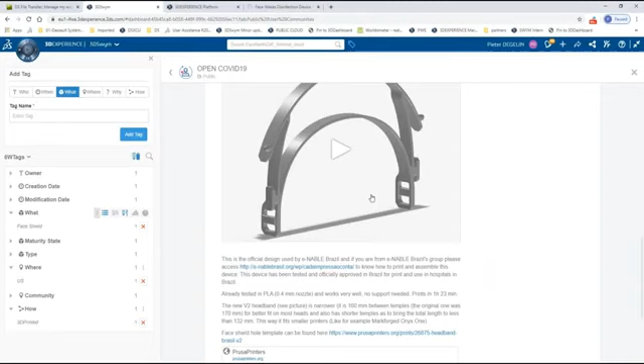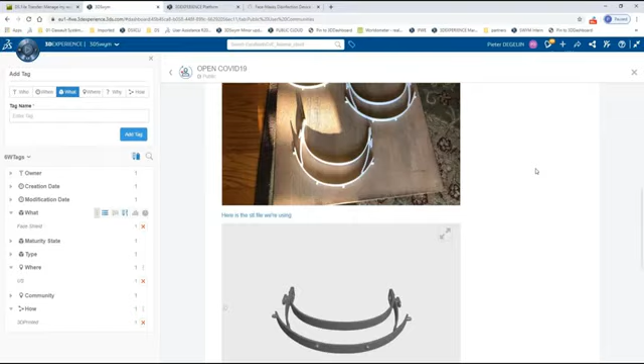And here you can see that somebody in Brazil has done a design of a face shield bracket. I'm going to have a look in the web at how the 3D looks. So everybody in the company that has access to this community will be able to see the 3D objects like so. And obviously as well, we want to share the STL file so that people can print it at home. So I'm thinking this is a good starting point for our own face shield design mask.

And so the next step would be, since I have my own cloud environment, to create my own community. You can see the starting point is a dashboard, the V5 dashboard that is active now. I add an extra tab to it and I drag and drop our community tool. And I will add a community of our own, which we're going to call the face shield community.

So I will add a small description to make sure that everybody understands what the community is about. The idea is to gather people to brainstorm on some new ideas for a printable face shield screen. So I created the community. Since I'm the only member for now, I will only have the ability to see the content.

I will tweak a little bit the look and feel of the community, and I just drag and drop an image into it. I can activate the features of the community. I can define what type of community we want to have, whether it's a secret or a public one, whether people can make wikis, post questions, make ideas, and so forth. I can tweak the ideation pipeline. I can change the colors around and so forth. So the cloud is about configuring what is delivered out of the box, but you can see that you can do quite a bit of this.

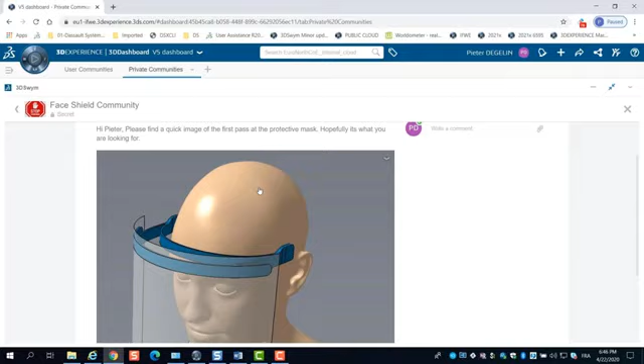Yeah, so I have immediate access to the post. I can have a look at it. I see the image. I think it's a great idea. And I will promote this post into an idea. So then it comes into our ideation funnel with the different statuses, and people can start liking, not liking, and so forth. So I'm obviously going to do it in the face shield community that we just created.

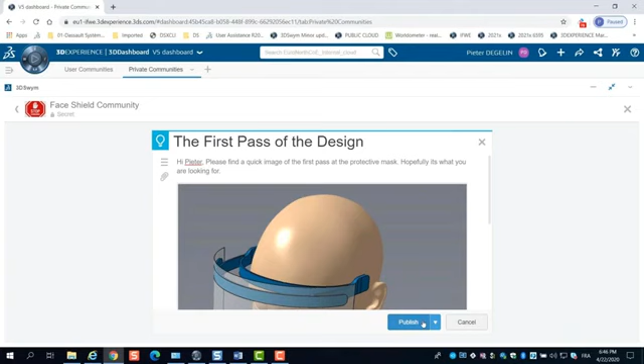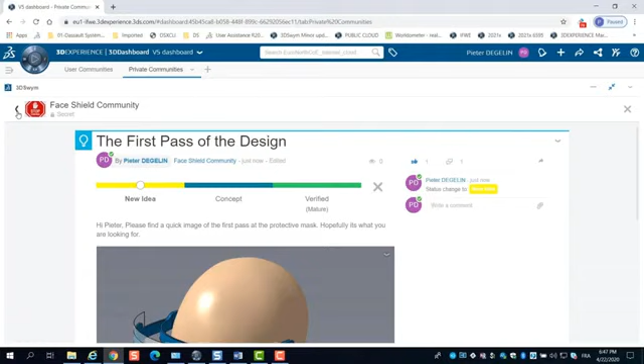And so now you can see with the blue lamp that it became an idea. And then we can have a look at the different ideas through the ideation funnel. So this one is obviously a new idea. I'm gonna like it by clicking on the thumbs up, obviously, because I think it's a great idea.

And here in the filter, you can see all the ideas that belong to our small community. Now, since it's a brand new one, only started just now, there's only one idea. I can hover over it and see, let's say, the summary of what the idea is about. And you can see who is liking it or not.

Now, in the meantime, Peter has thought about his design, and he has some questions about the headband securing point. What I propose to Peter is to start uploading his 3D V5 models into the cloud, so I can then do a proper review based upon the 3D information. So I'm just having a look at what he is posting to me through this community.

And at this point, I was still local, wasn't I? I wasn't in any cloud. I was still on my local machine working in V5. So the next step in the story is how can a CATIA V5 user connect to the 3DEXPERIENCE Cloud? And so the first bit we needed to do, of course, is to install the connection between the local CATIA V5 installation and the cloud.

And so for that, we need, of course, to have the right role. In this case, it's the Collaborative Designer for CATIA V5 role that will be assigned to you by, let's say, your cloud administrator. And once you have this role, you have access to an application which obviously is called CATIA V5. You can add it to your favorite apps if you like. And then you will click on this application.

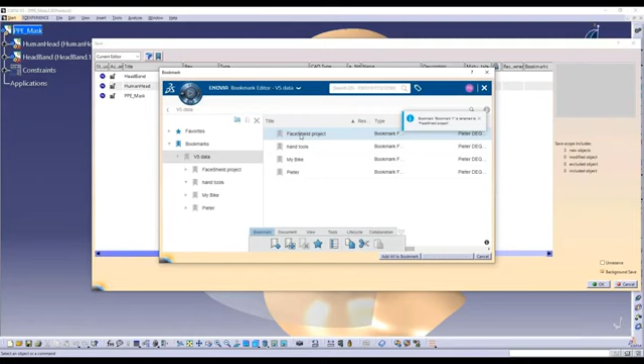So we're adding that to the bookmark. One other thing to mention as well, that we're going to allow something called a background save, which means that once we activate that save, this assembly has been locked, so I can't change it. But we'll see in the bottom right-hand corner, there's some green progress bars. And what that means is it's now uploading. So we can still carry on and work in the background whilst we're uploading our data to the platform.

So in this case, if we want to create a drawing, we can simply go into the drawing functionality, and we can see that in the background, the mask is updating and it's now completed. So the lock icon has disappeared.

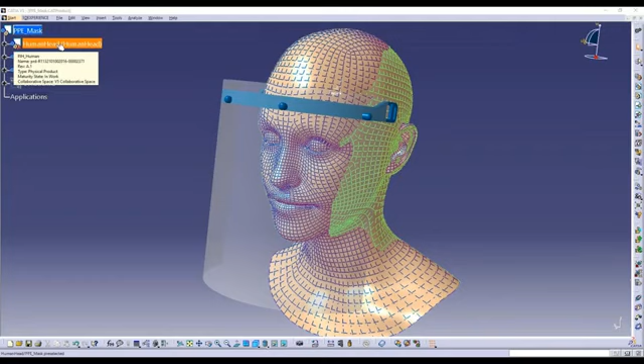So once we're into the 3D Experience platform, we're able to gather information from it directly. So we can see a highlight there, it's revision A. And we can even look at the properties that have been put into the 3D Experience platform. So it tells us who stored it, when it was stored, what the revision is. So if we want to get some traceability, and it'll even tell us which extension, in this case, Catia V5. So from here, I'm going to hand you to Peter to tell us a little bit more about the platform and what that can bring.

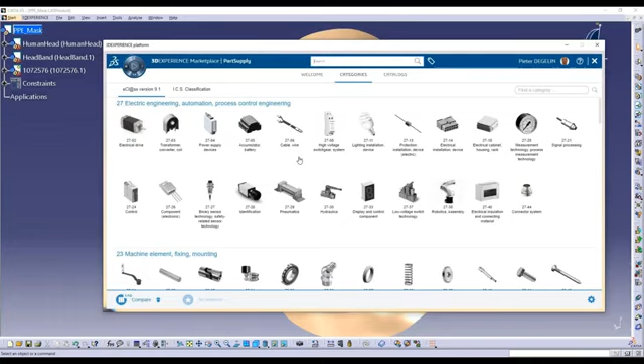Yeah, so one of the interesting features as well that come with the Catia V5 integration is the access to PartSupply. So PartSupply is actually a library of standard parts. So you can see we have around 30 million standard parts in there. People can have access to categories of parts from within Catia V5. You can just click on one of the categories and then get access to the parts right away. Or you can do a search, of course. You can search by country, by category, by provider, by publisher, and so forth.

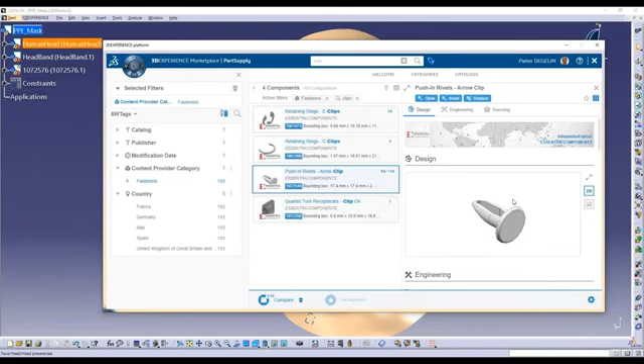So what I want for our design is a plastic clip. So I just type clips. I'm going to look in the fasteners, and then I find something that looks like something I can use. I can add it to my list to compare with other selections I might find, or other parts I might find. There is a configurator tool in there, so I can choose the right size. So I'm going to go for 6mm one.

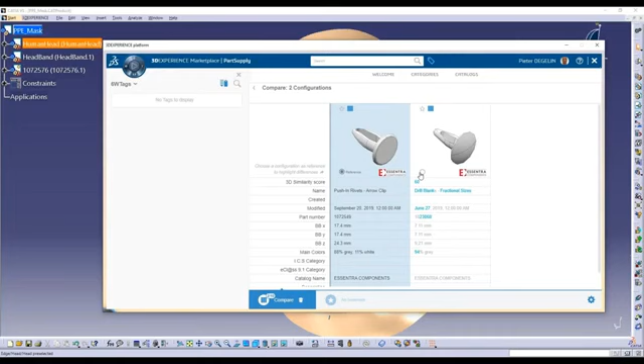There is a similarity search that is automatic, and then you can compare the two parts that you find, and you will see the differences in blue. You will see also percentage of similarity in there. And then I can just simply insert with one click on the button this part into my V5 assembly. So you have the part in the assembly now.

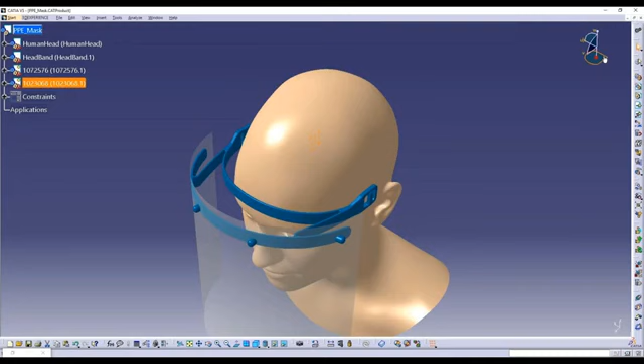Obviously, it's a new part. I can use the compass to change the position a little bit, or to put some assembly constraints in there. And there you go. So this is also a great added feature that comes with the cloud integration with Catia V5.

So we'll go to the next step. So Peter has done his design in Catia V5. It's now in the cloud, and the big advantage of that, of course, is that I, as a project manager, can then create some reviews in the cloud without having access to any 3D tool. And that's what we're going to show you in this step here.

So I start off again from my dashboard that has two tabs, the user communities, private communities, and I'm going to add a Face Shield project data tab. Now, the idea here is to gather all the data concerning our Face Shield project. And for that, I'm going to do a search in the database, a simple search like you do in any database. I search for mask.

You can see that I have two posts, and I have a Catia V5 assembly that sits in this collaborative space here. And then I can pin this search into my Face Shield project data tab. Now, the interesting part of this is that it's a search, meaning that whenever new data arrives, it will automatically be added to this search result. I again can further drill or filter my search results if necessary.

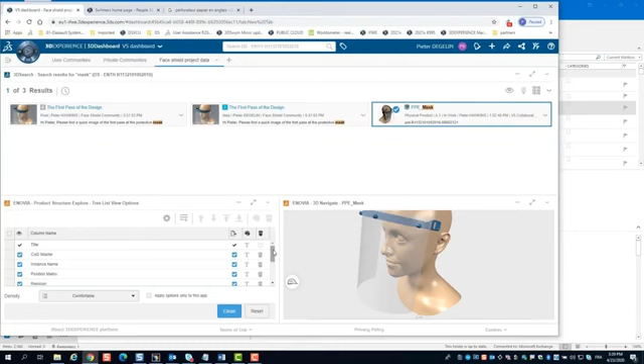I can even go into the settings of my widgets. I will make it a little bit bigger so you can see what I mean. I will add some thumbnail displays there. I can add any attribute that is available in the platform. I can change the order of things. So any of these widgets can be, let's say, customized to the user needs so that he gets the right information at the right moment.

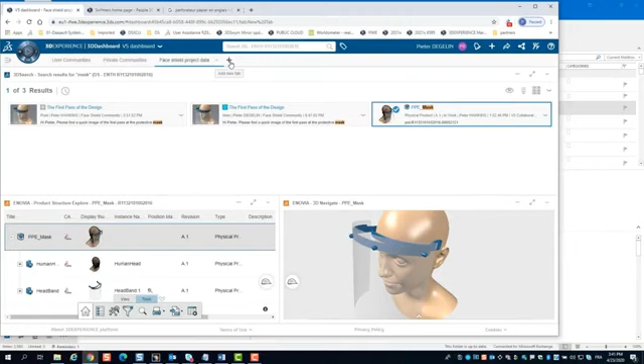So here you can see our revision A of the mask. I have a 3D visualization, and so this will be my start point whenever I want to go back to this project data. So next, I will add a review tab, and in this review tab, I will add an application that we call 3D Markup. So I will drag and drop the widget in there,

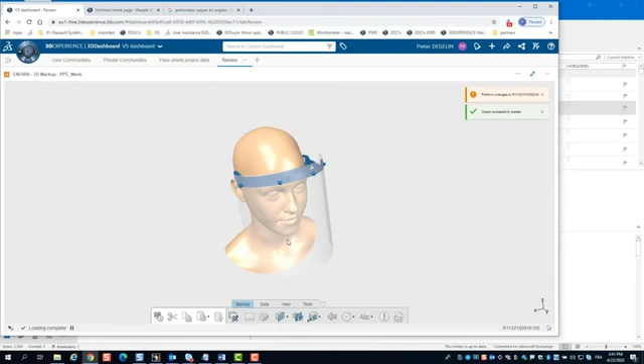and now I can make this a little bit bigger, go back to my Face Shield project data, and drag and drop the data into my review. So on top of the 3D visualization, what we can do now is we can start adding some comments to do a proper review based upon the V5 data created by Peter.

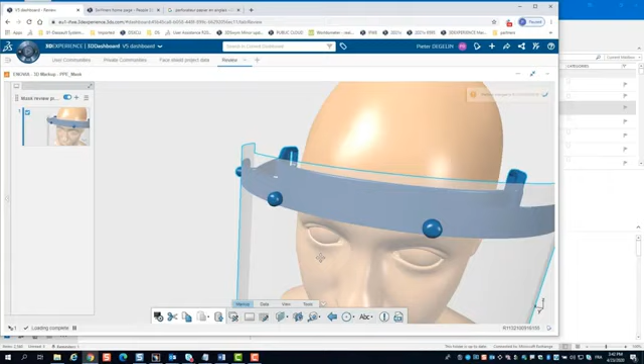So I'm going to start by creating a markup object. And the great thing about markup objects is that they will not touch the original V5 data. There's going to be a link, of course, between this object and the CATIA V5 assembly. So my markup is created automatically. I have a first slide, and there are a couple of changes I want Peter to do.

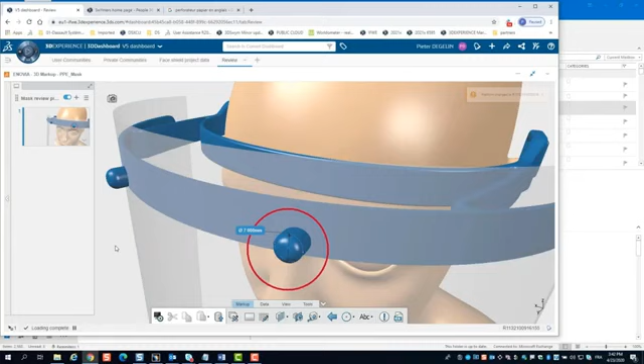So the first one is that I want people to be able to build this device or this product easily at home. So we're going to do some small enhancements. You can see the diameter here of this plastic clip is 7 millimeters, which is not really the right one, because we want the hole diameter to match the standard hole puncher size, which is 5.5 millimeters.

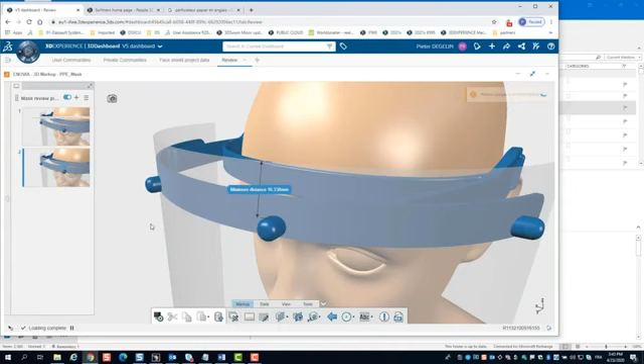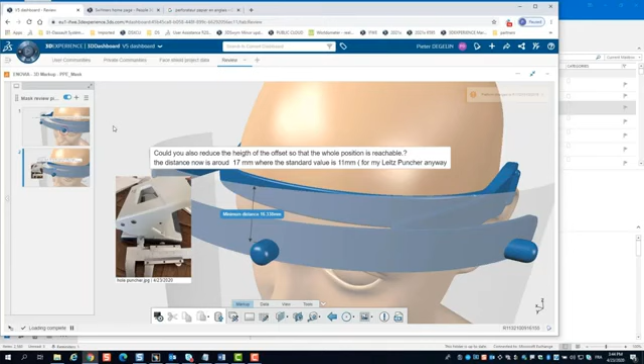The second modification that Peter needs to do is to adjust this offset here a little bit. So again, to make sure that we can easily punch the holes in the transparent shield with a standard tool. So I'm going to add a picture of the standard tool that I'm going to use. So this is the hole puncher I've put in my slides, to make clear what Peter needs to do.

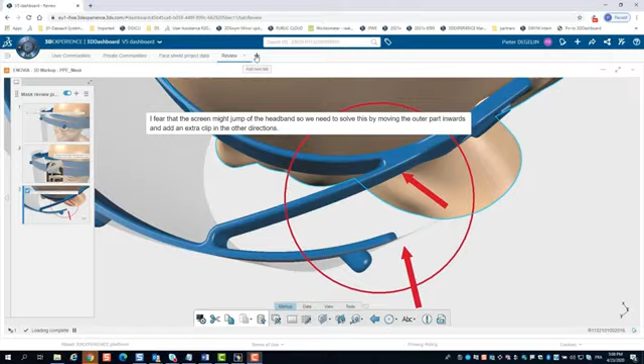And then a third modification. So again, I'm using the markup slide to explain what I mean. I want to give people a couple of options to fix this part to the face, and so I describe what I think Peter should do.

So last but not least, I'm going to create or add a new tab, which is the Lifecycle tab. For that, I'm going to add a product structure editor widget. We have a couple of other widgets that would do the same job. And in here, I will drag again my assembly. So we'll move it from our face shield project data into the Lifecycle tab.

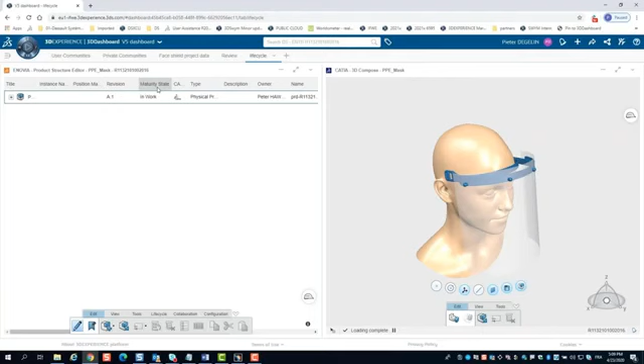And what we're going to do now is we're going to prepare Peter's work so that he can right away work in a new revision. So obviously the maturity state and the revision is important information for me. So I tweak a little bit the position of the different columns. And you can see now that the mask itself and the two parts are in work, and we are in revision A.1.

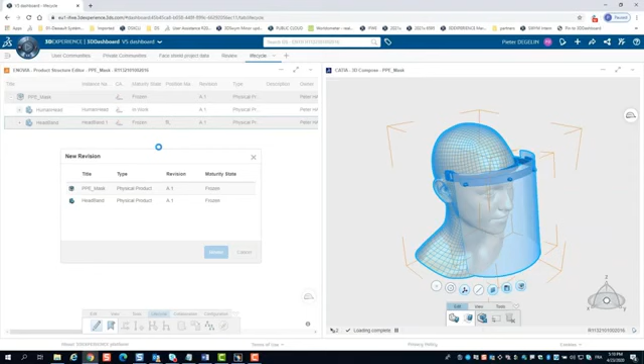So what I'm going to do now is from within the web as a project manager, I'm going to put the top assembly and the headband in frozen so that this data is a little bit secured. And at the same time, I'm going to create a new revision. So the web interface allows a project manager to prepare the work for the designers so that they only have to focus on the real design work.

So now you can see that we have a revision A and B for the assembly and the headband. And I can even put them side by side in my 3D view so I can see the differences if there were any. Now, of course, here there are no differences because the one is a copy of the other.

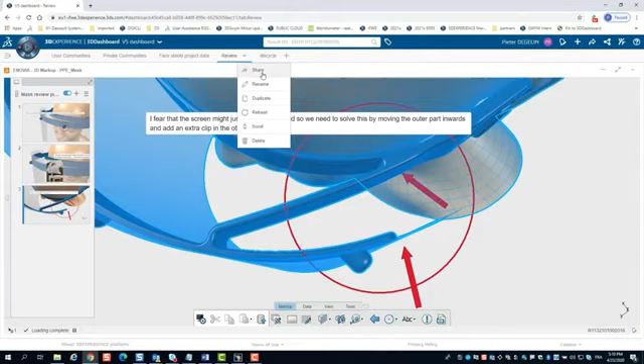So once my preparation is done, what I'm going to do now is share these two tabs to Peter so that he does not have to lose time figuring out what he needs to do or searching for the information. So I'm starting to type Peter's name. There's an auto-completion. I can type in a small message.

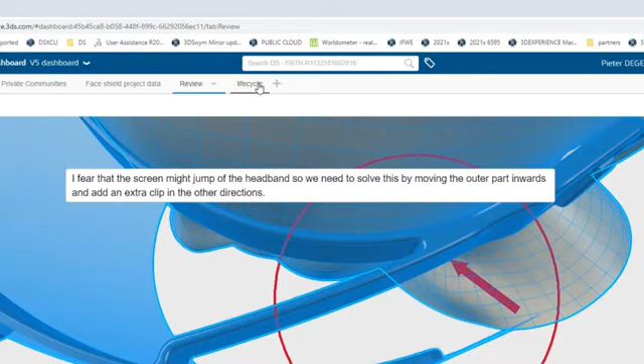Look, Peter, I want to share this with you. Can you have a look? There are a couple of modifications that I propose to do. And I'm going to also share the Lifecycle tab so that Peter sees immediately that I already created the revision B for him and he can do the job in the revision B.

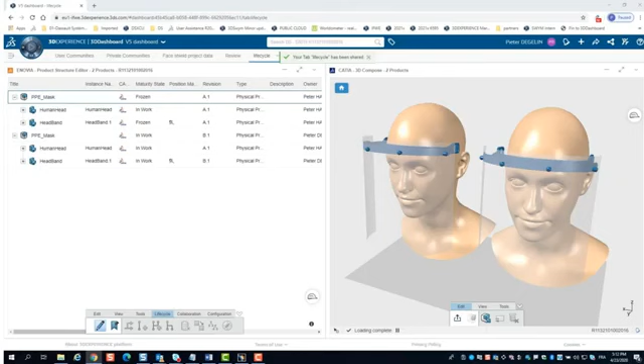So you can see that the tabs have been shared, and now it's up to Peter to start to do some proper design work based upon my remarks.

Okay, so if we pick it up from the design perspective, you'll notice I've got some notifications come through to my platform. And the first thing I can see is that Pieter has shared the review tab with me. And we're going to simply select that tab and we can pin that to our dashboard. So in this case, it's going to be my home dashboard.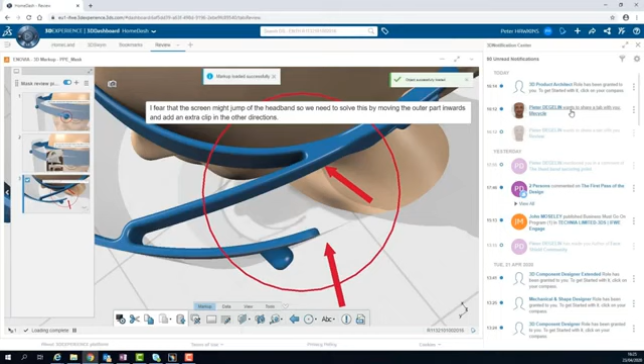I can then also see the information that Peter shared. So there's a few issues I need to correct. Before I dig into those, I'm going to pin the Lifecycle tab as well. And this is a great tool for being able to create your lifecycle, your snapshots in time. So rather than doing save as on a file, you're physically configuring it from here.

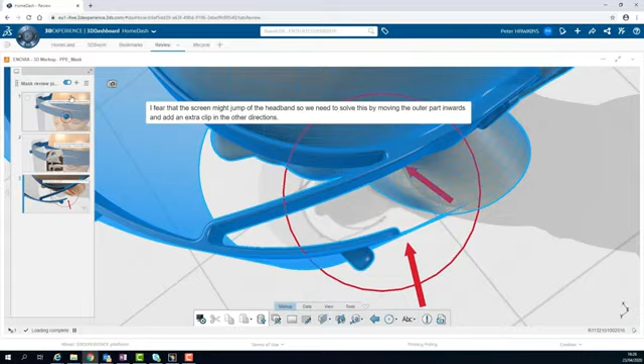So I'm going to have a little look at the review to see where I've gone a little bit wrong. Obviously that diameter, as we mentioned before, we need to change that so that we use a standard hole punch. So I'm just taking a little note of that, and then we'll jump to the next one, which is obviously to move that acetate A4 sheet downwards.

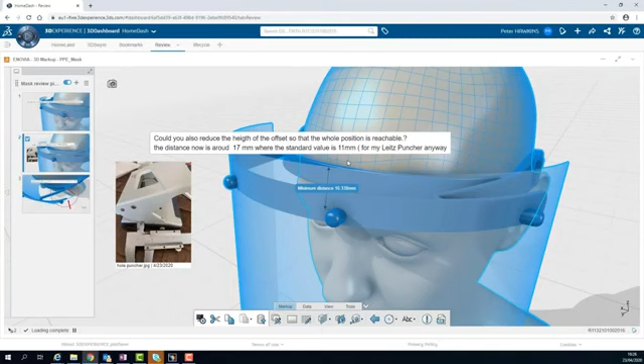And again, everything was built around that mindset that we'd have a standard piece of clear transparency sheet that we would use with a standard hole punch. And then finally, I need to go on, evaluate and see about putting some cool location lugs on the side of the headband.

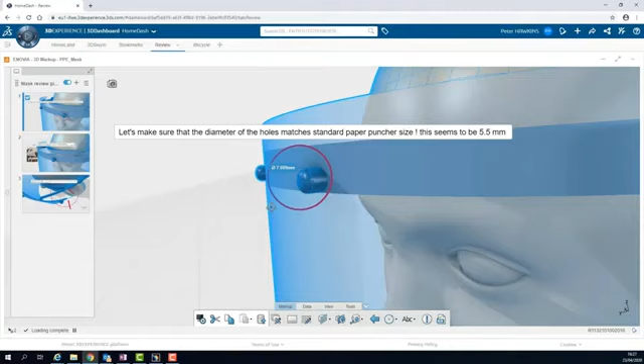So as Peter mentioned before, just refreshing my mind on that one, he's already done the lifecycle, the hard bit for me. So he's created me a framework, if you like, already. So it hasn't been in CATIA or anything, it's just been done within the platform. And I can see that I've now got a second version that I can start working on. It's now moved to the revision B, so that's the numbering system we're using. The head hasn't been changed because that's a standard part.

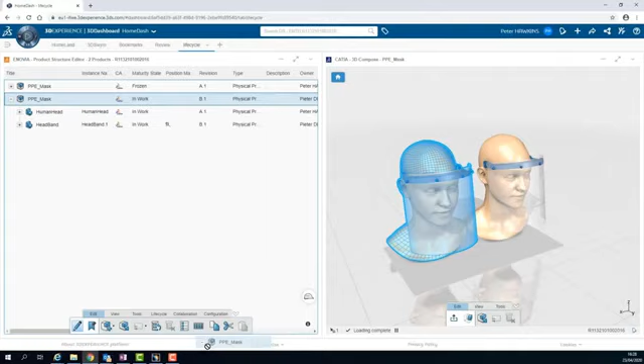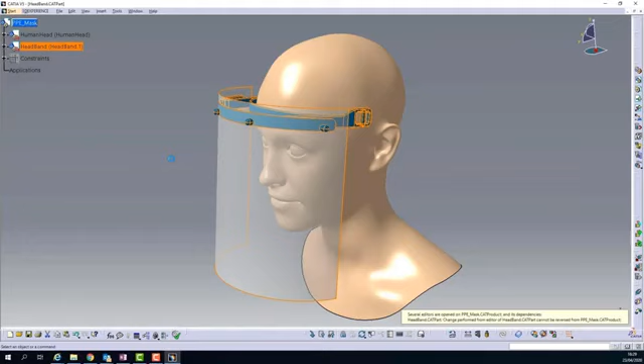And we're now going to simply get hold of that data from within the cloud and drop it straight onto the CATIA V5 icon, and that'll now launch that assembly and download it, and I'm now working with that data within CATIA V5. We've also got the ability to lock things off. You'll notice it asks me about reserving the files, but the file I'm going to work on is my headband. I tend to like to work down at a part level, so on its own. So I'm now opening that.

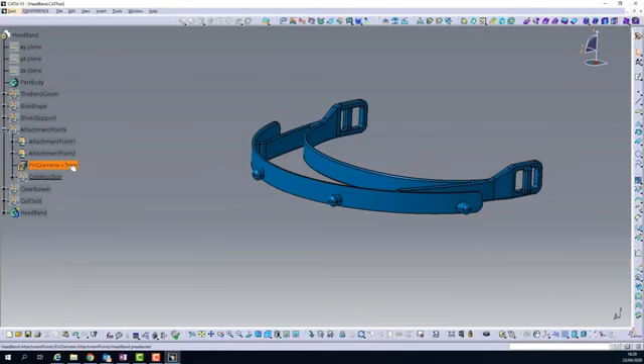And before I change anything, it's going to ask me again, do I want to reserve this? Again, because it's myself and Peter working on this project, I don't really need to worry about that at the moment. And we now need to go and have a look at those attachment points of where the shield actually fits onto the headband. And I've grabbed a nice little parameter here, so it's very easy to find the changeable things in CATIA. So we simply make that change quite quickly.

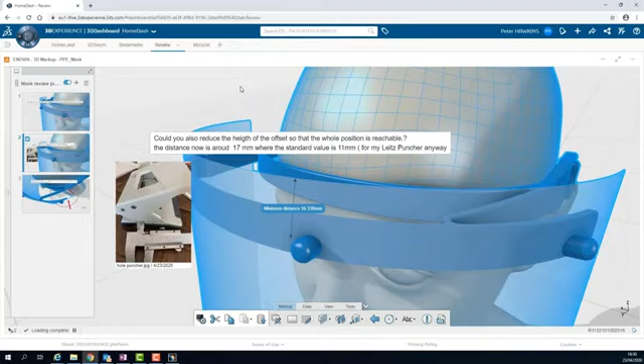We can also switch back to our assembly, and we can see the face shield is looking okay, just checking that out. And if we go into the platform, I'm just trying to remind myself of what value I need to drill in to move the shield down. So we'll just literally go into our clear screen, and I've got a top of shield plane that we can literally tweak and adjust and get us to just pull it down in line with the headband.

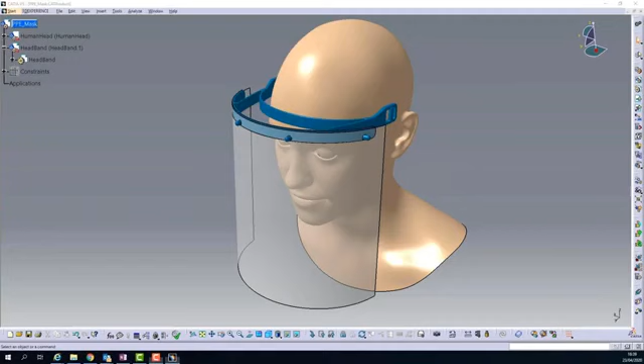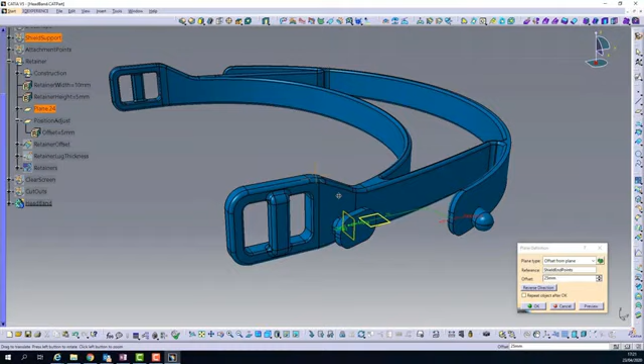So that was my sort of first pass after an initial review with Peter, and I was just double checking. There was one other thing I nearly forgot, and that is the location point. So here, the ethos is we build this from a 3D printing plate upwards. So everything wants to be mounted off of that flat plane.

And here I'm just literally playing around, having a look to see where I can place that and making sure that it is flat with the base plane. And then I can just simply add some radiuses and make it look pretty cool. So it's all smooth edges for the user.

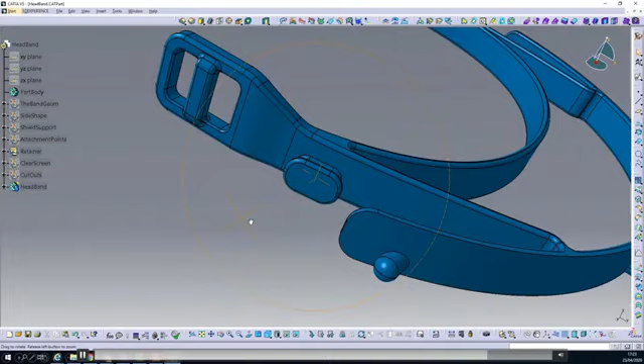I like to spin a lot. It's quite cool. I think it's an OCD habit you get.

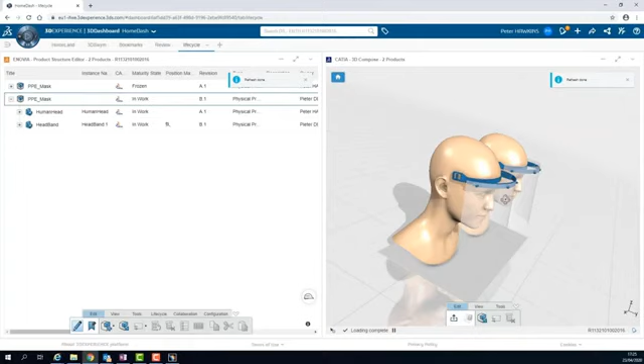And then we go back to the main assembly. We can see, obviously, those changes have been implemented. And I just literally update the graphics here with the platform, and I can see that data so that even a non-CATIA user can gain access and visually see the progress of our design. Which I think is coming on nicely. Yeah, cool.

Okay, cool. So how can we then do some sharing of the data that Peter has created and solve some further issues making use of the 3DEXPERIENCE Cloud? So the first thing, I'm logged in again in the platform, and what I see, I have a notification from our friend Vijay, who is also involved in our small project, signaling me that there is an interesting study done by some very bright simulation people in the COVID-19 community, that they've done a sneeze analysis, and he suggested me to have a look at it.

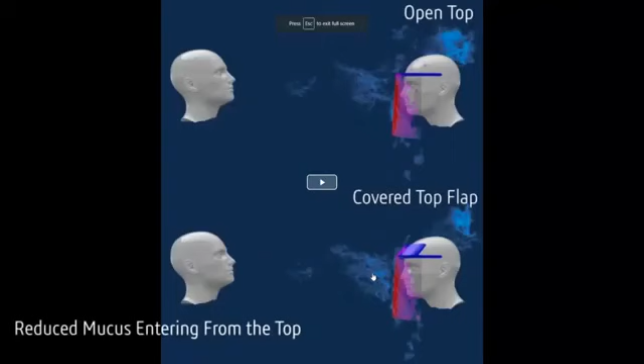So let's have a look. So you can see here, they've used simulation tools, XFlow from Dassault Systèmes, and they figured out that these face shields are great, but without, let's say, a covering between the shield and the forehead, it's not really very secure. So they've even analyzed it a little bit further. They've tested a couple of designs. So you can see the open top and the flap top, the cover top, and then the wide cover top. And the analysis they've done, if you read closely in the article, shows that the wide cover top is actually the best solution.

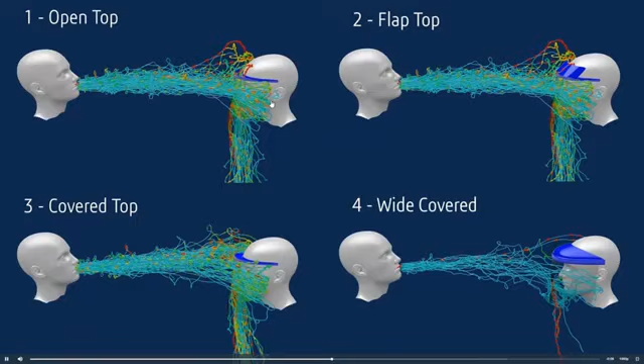So that makes me think, and what I'm going to do now is I'm going to start discussing with Peter about this. So the easiest way to do it is to share this link with Peter, of course. And by the way, I'm going to subscribe to the content, so anytime that somebody makes a remark or adds some new information, I will be notified. And I'm going to share this article with Peter. So Peter will receive the information, and then he can start thinking about perhaps designing a top flap to our design as well.

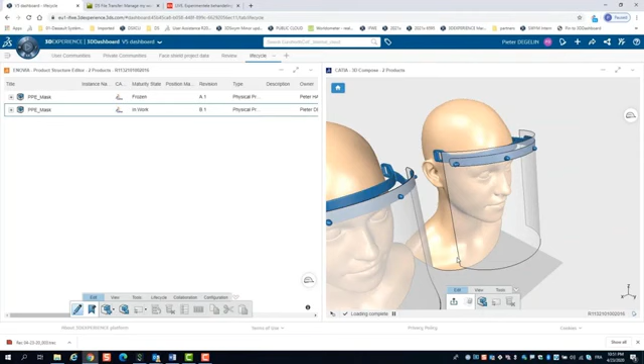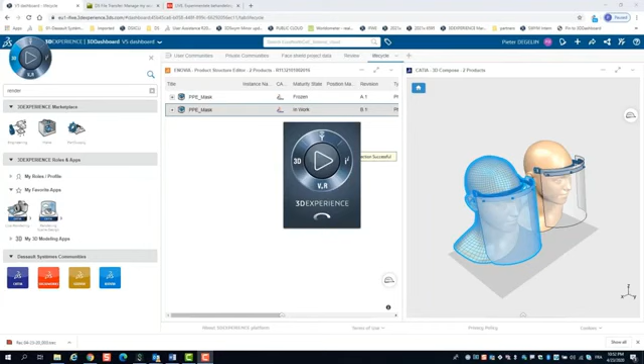Now, while Peter is getting notified and reading my ideas about it, what I can do as well is I can simply open up the first or the second revision that Peter did with the live rendering application, which is actually part of the CATIA 3DEXPERIENCE portfolio. And what you will notice is that I can simply select the CATIA V5 data in the platform, click on the live rendering application, and then automatically the CATIA V5 data will be opened in CATIA 3DEXPERIENCE. So no need to convert or migrate this data. You can simply open up the native V5 data.

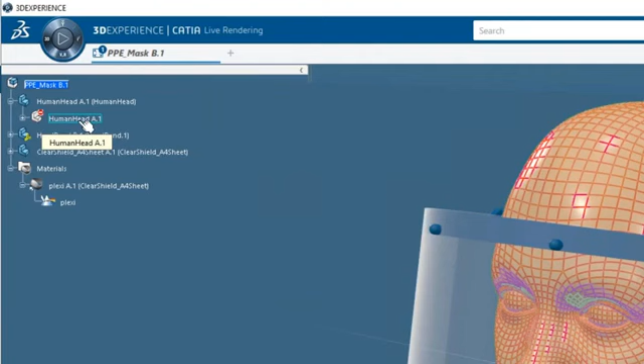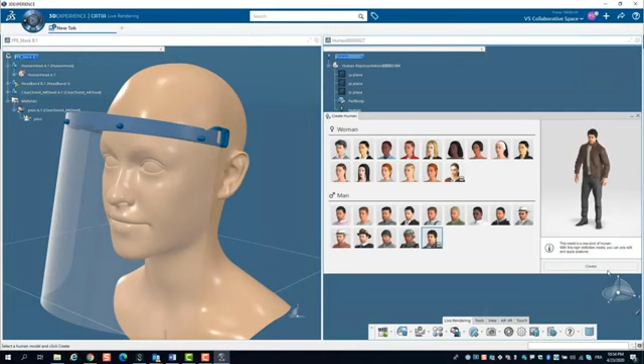And by the way, you will see on the level of the shape container that there is a stop sign indicating that this data is, let's say, mastered by CATIA V5. So Peter will be able to modify, and I, having access to CATIA 3DEXPERIENCE, will be able to repurpose the V5 data downstream. So one of the downstream applications I want to do is to create some nice renderings.

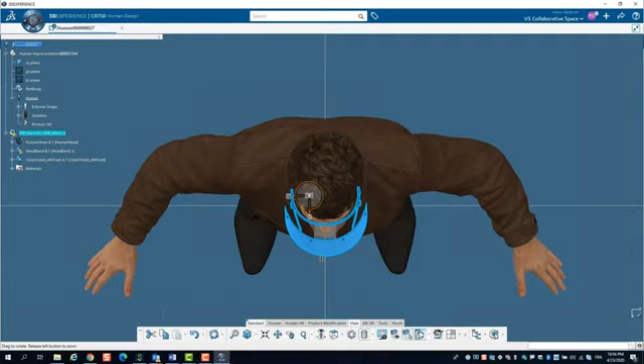And so for that, I open up a human or a mannequin, and I will drag the face shield into this human so that we can put it, let's say, in a more realistic setting. And I will position, of course, the face shield mask with the classical positioning tools I have. And I can even connect the face shield to the mannequin's head. So we call this a product connection. So we'll select the product I want to connect, and then the bone or the head I want to connect it to. So that's done.

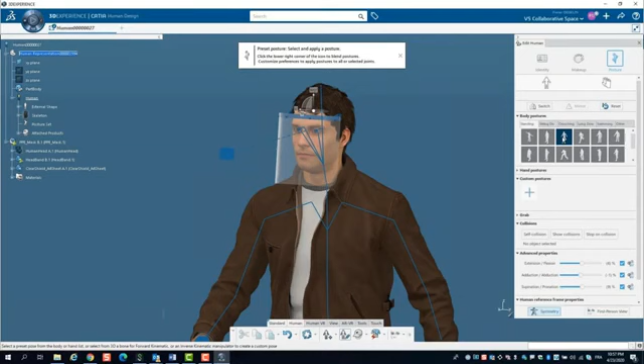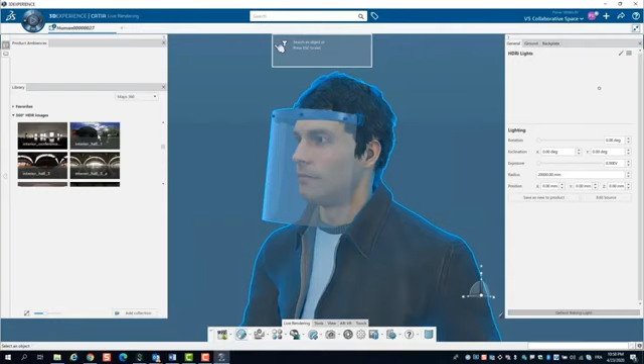And what's great about these mannequins is they come with the full kinematics. So you can have different postures, and you can even move, for example, the point the person is looking at, so that the face shield will follow automatically. So this allows us to build a nice, realistic setting. The one thing that is missing, of course, is an ambience, and an ambience is actually a 360 image with some light source information in it. You can add the default ones that come with the software, but you could also put in your own, and there are millions of them available on the web.

And then it's just about quickly generating a nice rendering. Now, you've seen that I only did a couple of iterations here, 16 to be precise, and I used some artificial intelligence to do the calculation more efficiently. Once the rendering is done, then we want to share this with the colleagues.

So I'm going to share this right away in our face shield community. And so if I go back to the community, you will see that the post has arrived right away. So you can click, or people can start clicking on the rendering, download it, and comment on it.

So I'll just quickly make a second one. I'll change the position of the person's head. I can change the ambience, the light sourcing, and so forth. And I generate a second rendering based upon Peter's initial idea. And then we can share that again in our face shield community.

If you want to make it a little bit more private, you could share it as well in the conversation, so that not everybody in the community will see it, but it becomes, let's say, the topic of a more private conversation. So I just do a refresh, and there you can see the second image that is now available to the colleagues.

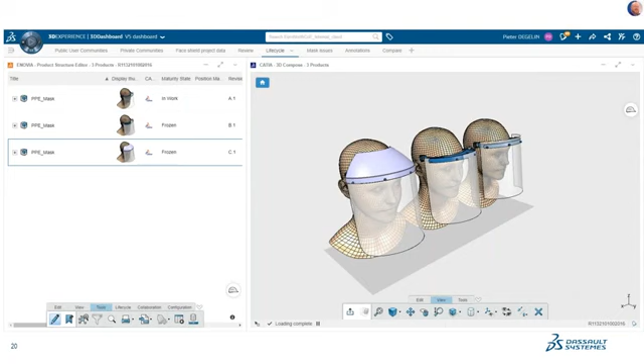All right. So while Pieter's been busy doing that, I got the results about the face shield and needing to add some top protection. And what I've done is created another version of that. And I've actually shared that information with Pieter to go and print it. So we wanted to be able to print this on a 3D printer. We wanted it to snap onto the headband and take all the support from the front band. So that was kind of my design brief. So Pieter actually did print this. So we can go on with that next and see how it went.

So here, what I wanted to demonstrate as well is that everything you do in the web can be, of course, done on a mobile device. In this case, I've done it on an iPad. And I started printing the clip on top, and I noticed that there were some issues. So I'm making use now of our issue management tool that is, by the way, part of the standard, let's say, apps that come with the integration.

And there is an issue with the thickness. It's too thin, it breaks, and it's not a standard thickness for printing devices, so we need to make it at least 1.5 millimeters. That's my recommendation. So in an issue, you can indicate what 3D file the person needs to have a look at. So this is the reported against.

So I'll just simply drag and drop it with my finger into the reported against, let's say, placeholder, and then I can indicate who has to take care of this issue. So in this case, it's a design issue. So again, Peter is going to have a look at it. And then, of course, we want to, let's say, document a little bit what the changes should be.

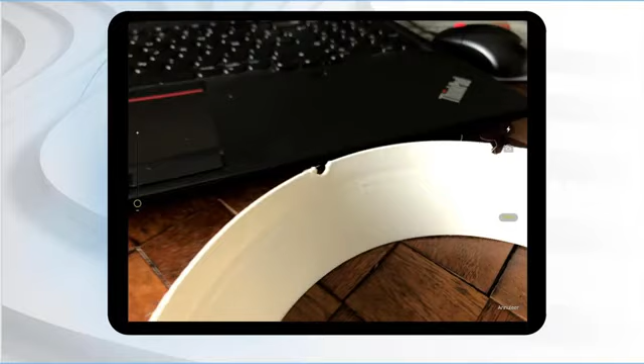So I will just activate the camera of my mobile device. I will take a picture of the crack that I noticed. By the way, this was a really quick print, so let's say the tolerance was not that great. And so automatically from my mobile device, I can upload the image. I can put some comments. I have a history where I can see who is doing what, and I can put the issue into work.

Peter will then get a notification of the issue through the notification center, and he can start trying to solve the issue. By the way, these issues could also be created from a 3D markup, the one that we've done in the beginning, so that you have all the markup information right away in the issue. And the resolution of an issue could be done as well with the change action, so to formalize a little bit the process.

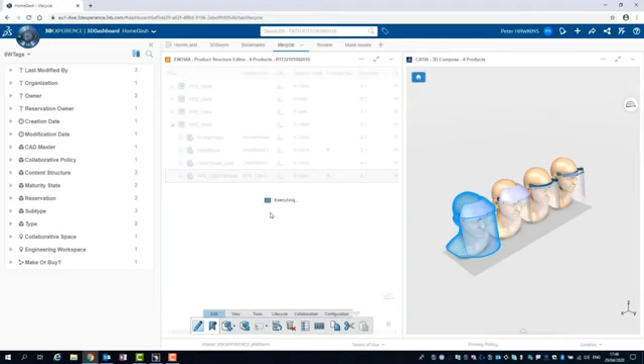So okay, I've got another version of the top of the face shield to put into place, and I'm simply going to replace my clip-on shield because we've got a second revision, so revision B, and I'm now going to load that into CATIA V5 simply by drag and dropping. And I'm going to start working on some cool features. So I've thought about some stiffening ribs I could put underneath it. We can also thicken the material as well.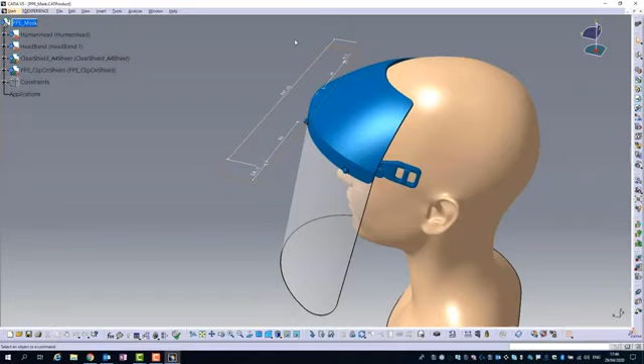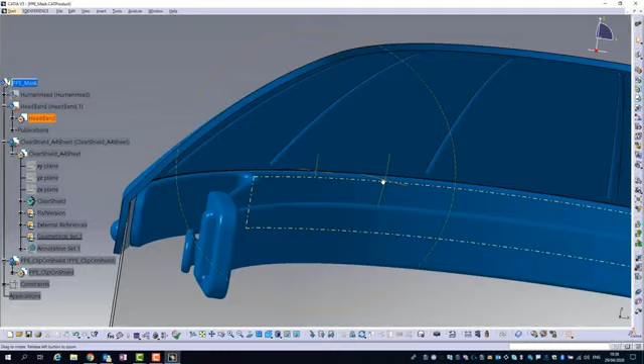So if I just jump into the actual file itself, I've even put some highlight lines analysis on there. And I'm literally using an existing rib structure and copying it and pasting it straight back in. Then updating the design, and as we look on the underside, I've put some stiffening ribs. I think we adjusted the snap fit as well so that it worked nicely. We've got some fillets and radiuses on the acetate sheet as well, so trying to alleviate the sharp edges. Again, that gets stored in the platform and saved.

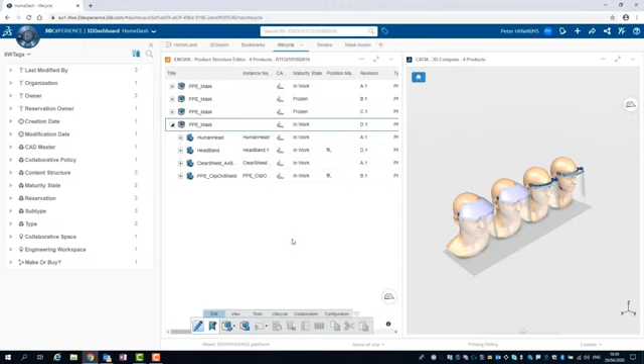Yeah, that's done. Yep, pretty much there. So yeah, Peter can now do a refresh again of his widget. And drag and drop. I'll go to the issues as well and explain I have actually fixed the issue that you gave me to fix. Yeah.

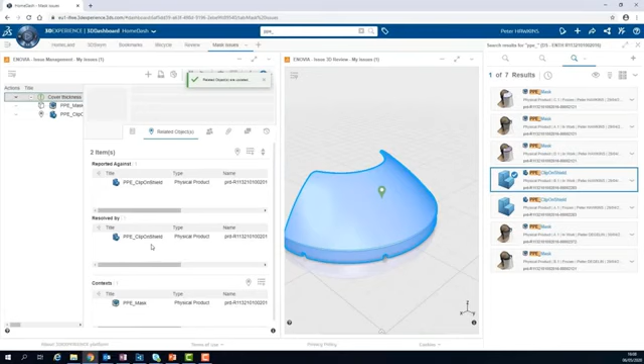So what's really nice about this one is that you can literally drag and drop the resolution part into the issue to have full traceability, and you can also review and complete the issue from there. And you have a small pin on the 3D to indicate where the issue actually sits, which is pretty cool.

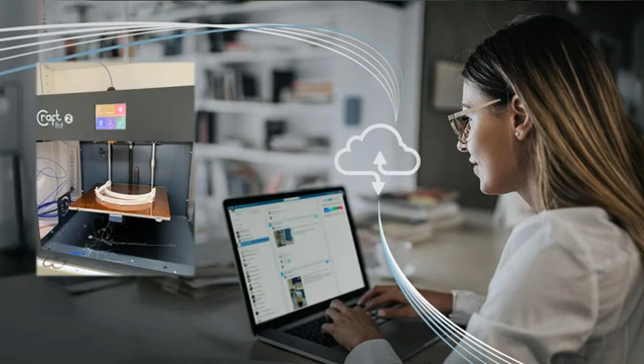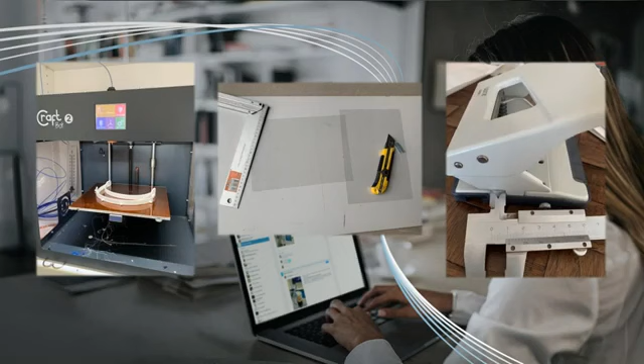So yeah, and now finally how to make. So obviously the idea of our face shield was to print it or to make it printable at home, so that's what I did. I cut my face shield, the screen, I used my puncher device, and then obviously we have the result there. But you can do it also in a more, let's say, industrial way.

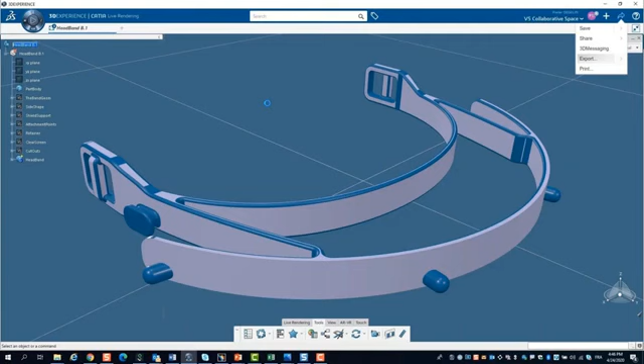And so here I will generate an STL file from within CATIA 3DEXPERIENCE to the 3D Drive. And the 3D Drive is, by the way, a feature that comes as well with the cloud. It's a sort of Dropbox that allows you to communicate with people that might not have access to your cloud environment. The main advantage of the 3D Drive is that people will be able to not only get access to the information, but also visualize the 3D information.

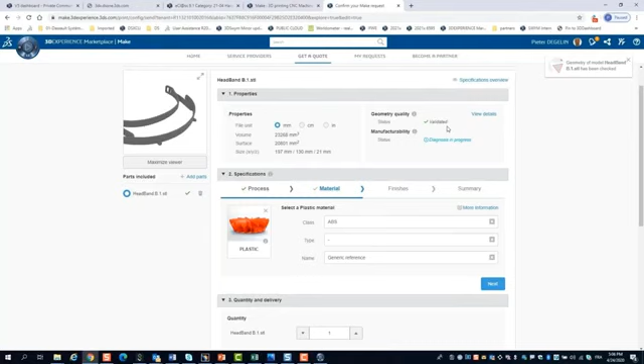So this company has 3D additive capabilities. They can do it in composites and in plastics. Obviously, we're not going to do this in composites, but in an ABS plastic. And I'm gonna have a look at the geometry quality check that has been done in the meantime. You can see what quality checks have been done, and I have green checks everywhere, so no problem. Peter has done a great design here.

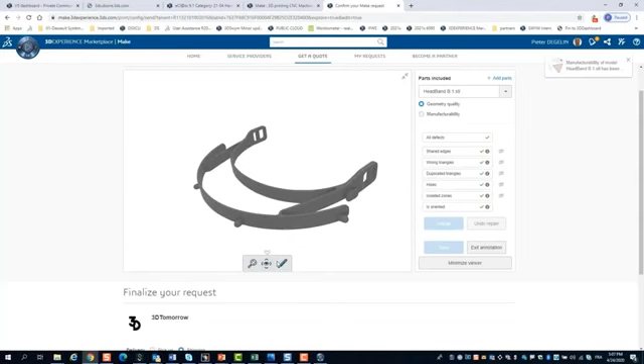If there might be a problem, we can do some annotations and we can explain what is perhaps relevant information for the guy or the company that needs to produce this. So we can save the annotation together with our request. We can have a look at the manufacturability information, and we see that everything is great again.

So it rests for us to select the color, to put in a tolerance. It's not that precise, so 0.3 is okay for us. And we will do a request for a quote for 100 parts, and I want to have it delivered next week.

So then I just need to send the request for quote, and the great thing, of course, is you can do multiple requests, and then you have in the My Requests tab on top of the screen an overview of all the requests you've done, and you can pick the right one. So up to you, Peter.

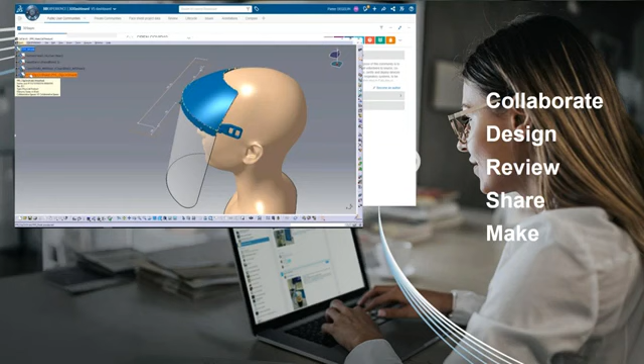Real quick summary then, what we've done is we've looked at how we can take CATIA V5 from a standalone implementation. So if you're working from home using a platform, using a collaborative space, being able to communicate on a chat basis and upload images. We then went into the design side where we put our assembly into the platform and we could start managing things like lifecycle. We were able to do a design review on the platform live between the two of us.

We weren't working together in person. We can use complementary roles like rendering within the 3DEXPERIENCE platform by sharing out that information. And then finally, we actually went and made the product using a real 3D print. And I think Peter will model for us now the actual physical mask that he's had. Yeah, I will do that. So this is the end result. Worked. Yeah, and the clip-on worked just fine.

So the great thing about our experience is that we were sitting in our homes, communicating through the platform, using our own specialities. Peter is a great designer. I know the platform very well, and in a couple of hours we just built something, and the next day it was printed. So that was really a great experience for ourselves as well.

Thank you all very much. Yeah, thank you. Thank you. Can we? Okay, so first of all, before the promise of the 3D Experience platform itself, we promised two passionate Peters, and I think that from that perspective, we delivered well. So thank you both for that.